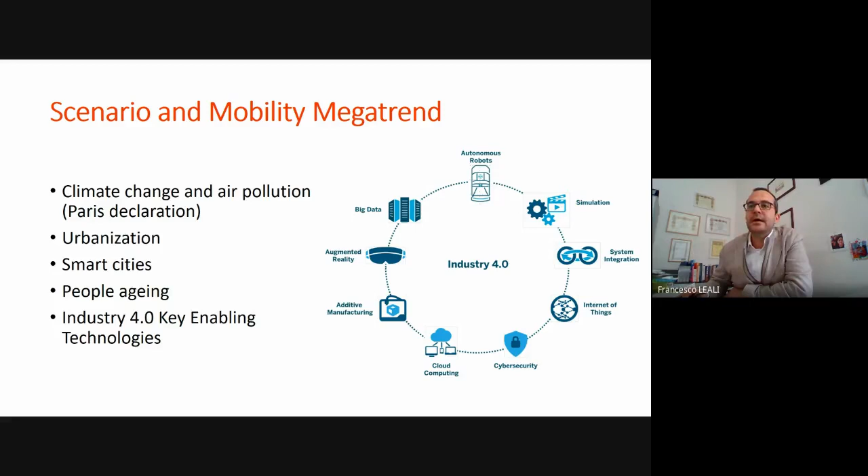If we stay on the vehicle, on the production and design of high-performance vehicles in particular, but let me say all kinds of vehicles that we are used to know and discuss every day, we have to consider some trends from a technological point of view.

Vehicles are more and more IoT devices, always connected, and are full of devices for driver assistance in order to help and to increase the safety on board.

But we have to develop and study also new solutions for powertrains in order to reduce emissions, in order to reduce consumption, in order to increase performance with respect to the environment.

And we have to exploit new technologies such as machine learning, artificial intelligence, that can help drivers move better along the roads and increase the performance of the vehicles themselves.

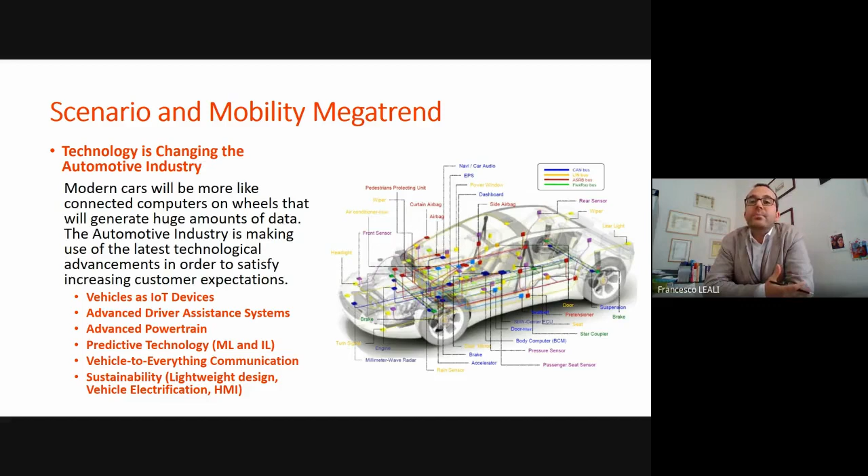Lightweight design, vehicle electrification, human-machine interface are other important keywords that you have to consider in our programs, in our educational programs in particular.

That's why we need to prepare a sort of super students, people able to know many topics: mechanics, but also electronics, automation control, IT, people able to discuss within multidisciplinary teams about economics, medicine, law, science, and to integrate using a vision based on the system of the vehicle to find solutions to problems that we don't know today. So it's very difficult to understand how the next future student, the next future professional in automotive will look.

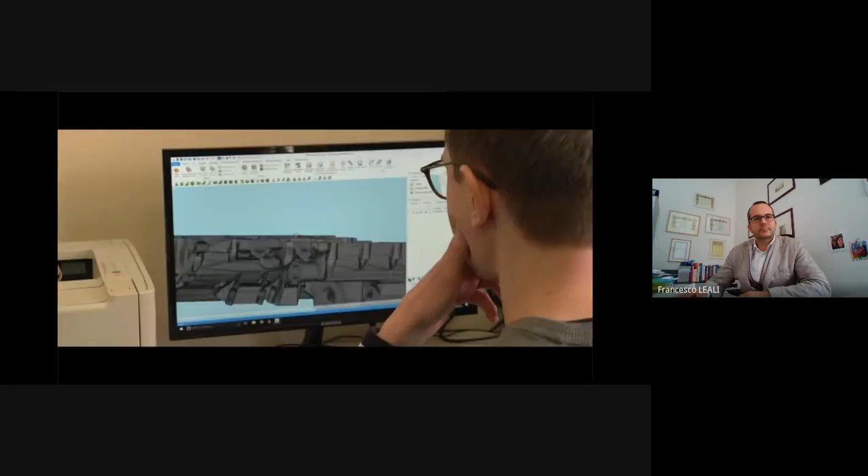All of them under 3 master's degrees with an innovative learning by doing approach. The most famous automotive companies in the world put their know-how and the most innovative technologies at the service of students, to train the engineers of tomorrow directly through their professionals. With MUNER, the most talented students will shift from designing to testing within the most renowned manufacturers, with the skills of those already pursuing the future and bringing it forward.

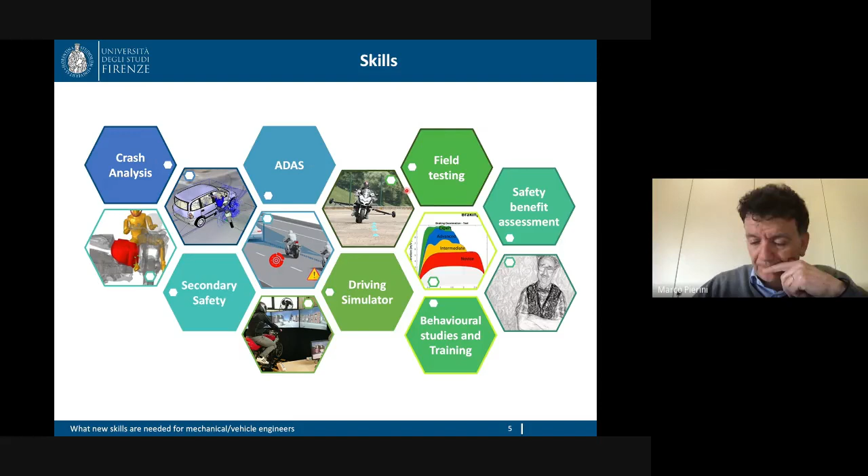Let's start from the beginning, just an example. If you would like to use your knowledge to solve these problems, you must start from the analysis of the real crash. You have a crash between a motorcycle and a car, and you need to understand the causation, why these crashes occur. In order to do that, you start collecting information, you investigate the vehicle, and then eventually you can reconstruct the accident.

What type of knowledge do you need? You need good knowledge in mathematics and physics, but also specific knowledge in structural engineering, which allows you to understand at what speed the motorcycle impacted the car in order to produce this type of damage.

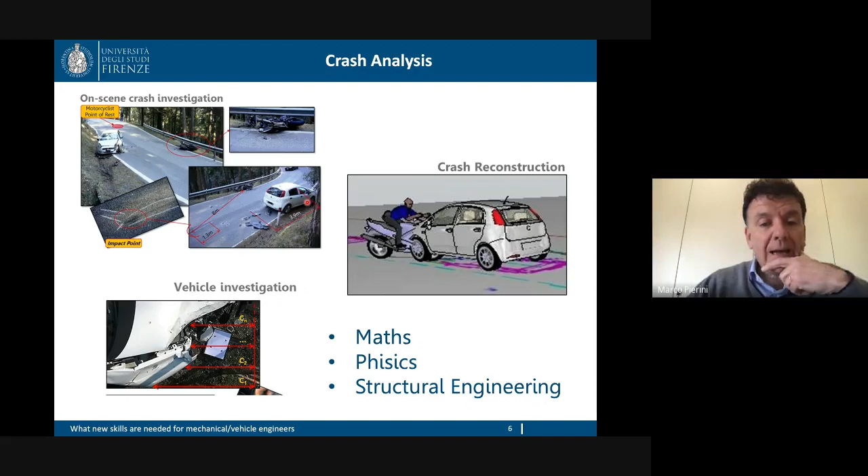Once you have understood the causation, you may desire to reduce the injuries of this type of crash. For instance, you can desire to develop a new type of helmet which protects the most delicate part of the human body, which is the head.

In order to protect the head, you need also to understand how the injury occurs on a brain. So you need to have information and knowledge on the biomechanics of the injury mechanism.

In order to develop the helmet, you need to acquire knowledge in computer simulation, because nowadays when you design a new device, you are always using simulation. But you also need to test the material, because inside the helmet you would like to include a soft material, for instance a foam, which is supposed to reduce the injuries in case of an impact.

Once you have developed your helmet and you have your first prototypes, you may desire to test them using a drop tower, a machine that lets the helmet hit an object and measure the acceleration that you have in a fake head.

So what type of skills do you need? You need information or skills in materials and material testing. You need, of course, knowledge in machine elements if you would like to design this new machine. And as I said, knowledge of biomechanics and computer simulation are also compulsory.

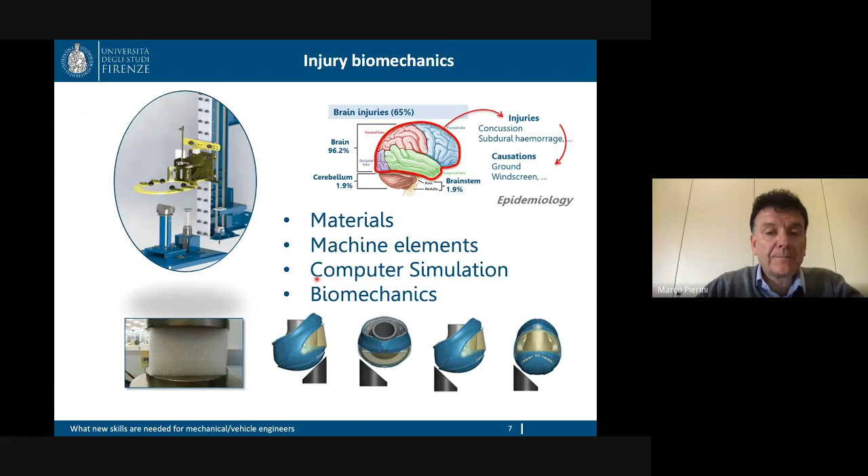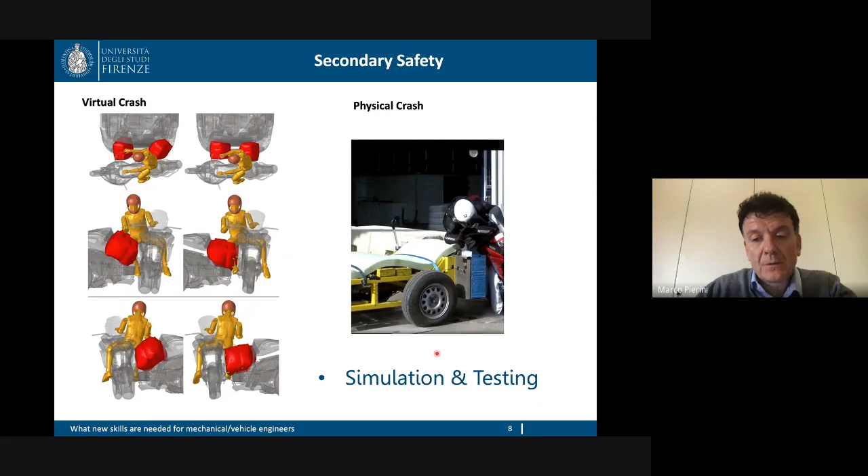But then you may desire to develop other types of protections. For instance, you would like to protect the leg of the rider by means of lateral airbags. Once you have simulated the system and decided the size and how to inflate your airbag, you need also to test experimentally the system. So you do not only need to have simulation skills, but testing skills are also very, very important.

Then let's move to the current and future of vehicles, which is the so-called ADAS, which stands for Advanced Driver Assistance Systems - systems which provide further information to the rider and let the vehicle interact with others. These systems are mainly based on sensors like radar, LiDAR, and cameras, which allow your vehicle to detect the vehicles in front of you, a car, a truck, and so on.

When you have detected them, you need to develop the algorithm to let the vehicle know that the vehicle in front of you is braking, for instance, and communicate this to the rider, and eventually, if necessary, also brake the vehicle on its own without the intervention of the rider.

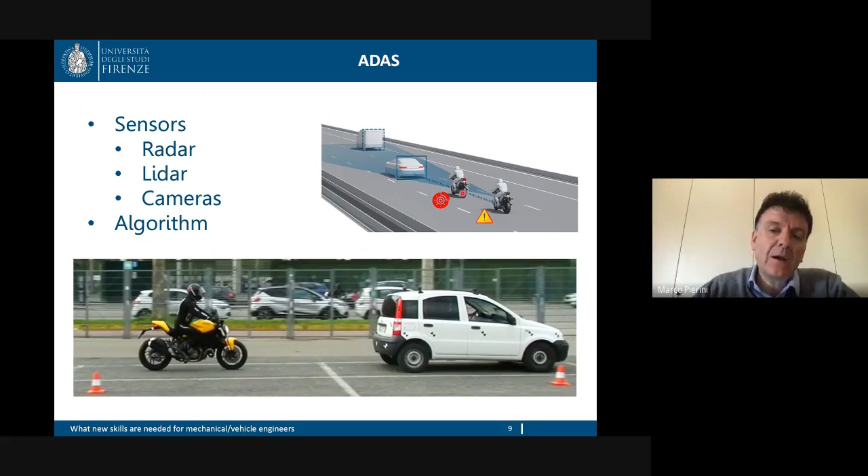Once you have developed this system, you may need to test it. Where do you test it? You may need to test it on a road open to traffic, but usually before that you need to test on a track. In order to perform the test, you need to install a lot of sensors on the rider and on the vehicle: accelerometers, gyroscope, GPS, pressure sensors, and so on.

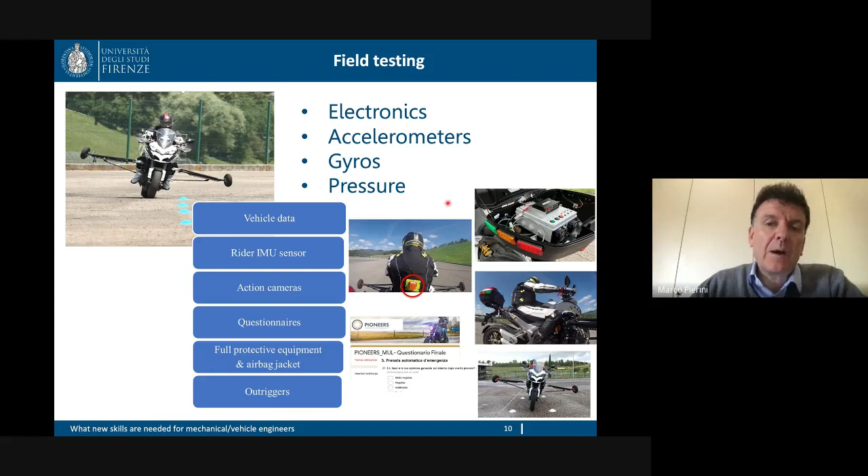You also need to have at least basic knowledge of electronics, because these sensors provide information, signals that must be acquired by acquisition systems. So you must be able to have a system which acquires this information for you and manages it.

Suppose you would like to perform a test with different types of motorcycles and different types of users in order to understand performance, for instance, in an emergency braking maneuver. To do so, you need to understand human behavior. So even if you are an engineer, you need to have at least a basic knowledge of the cognitive functionality of the brain and the behavior of the user.

This allows you to understand the difference between a beginner or novice rider and an advanced or expert rider. Or you may perform what we call naturalistic studies, which consist of installing a lot of sensors in a large number of vehicles, 100, 1,000 vehicles, and providing them to normal users for normal life, going to school, university, work. This allows you to collect a big amount of data, what we call big data.

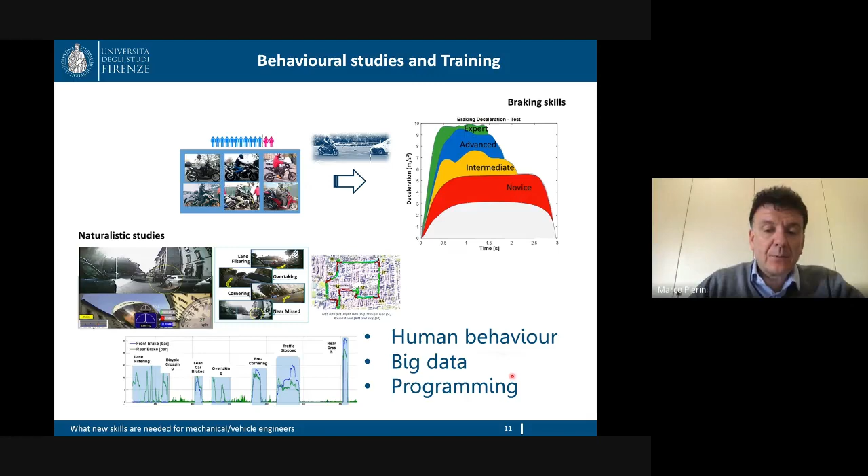But once you have all this data, you cannot analyze it manually. You need to develop your own proprietary programs to automatically detect the different behaviors, for instance when someone is braking, or overtaking, or cornering. So programming skills are very important together with human behavior skills.

Last, the future of vehicle development is also very much based on simulators. You have truck simulators, car simulators, and also motorcycle simulators. This technology is using more and more techniques like machine learning and artificial intelligence in order to interact with and adapt to the user. So knowledge of this technology, typical of the sector of informatics, is very important also for a mechanical engineer nowadays.

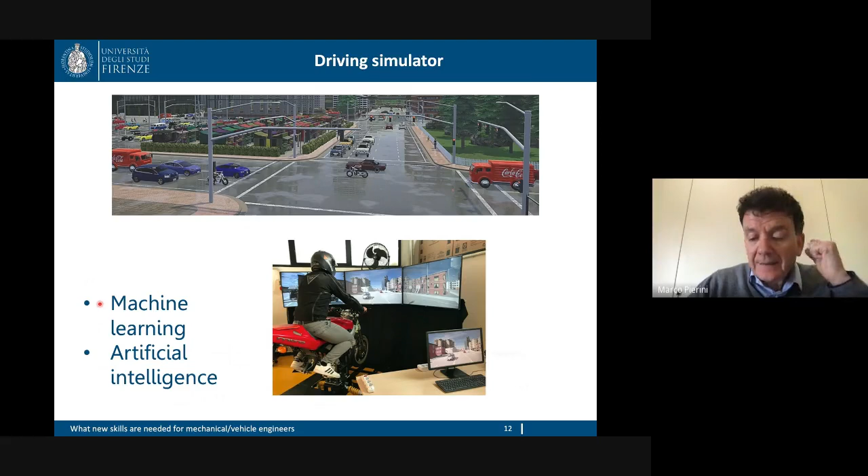Okay, that's it, I tried to stay within the 10 minutes. I hope I gave you a little understanding of what skills you need for the future development of vehicles. I will be available for questions, if any, at the end of the webinar. Thank you for your attention.

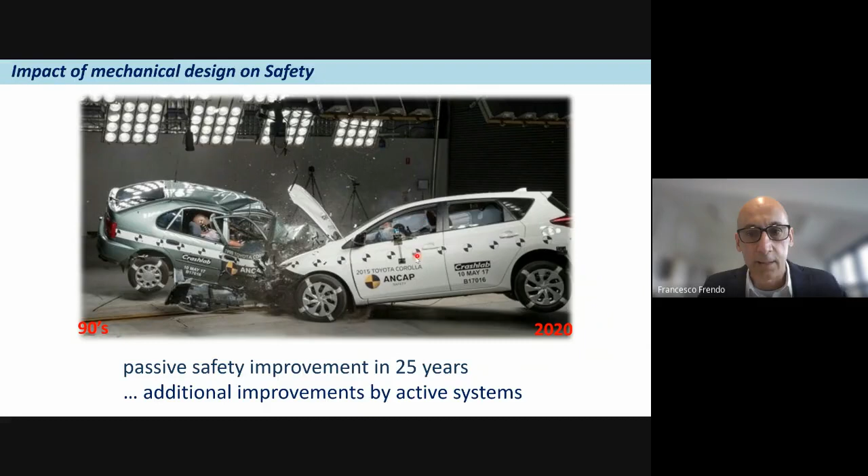You can see the results of a crash test of the same kind of car in the 90s and of a today's car. We can appreciate the integrity of the cell where the driver is inside. But maybe the greatest actual transformation in the automotive field is represented by the introduction of electric vehicles.

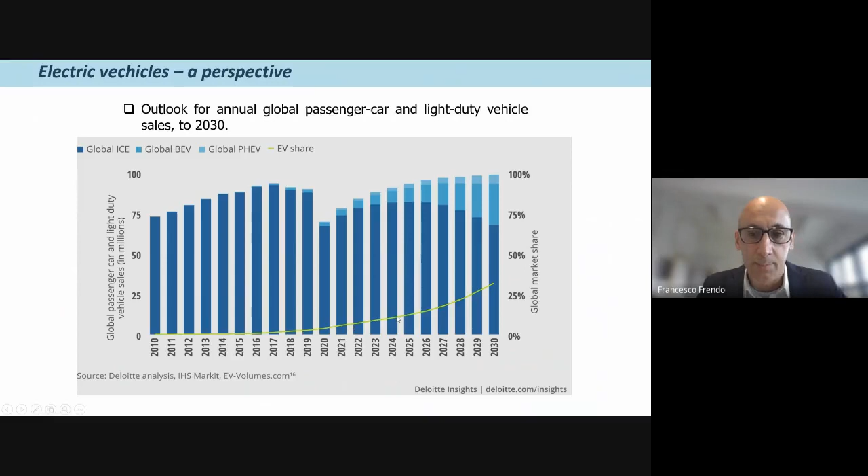Okay, but we are engineers, so we have to be curious and do some technical evaluations. So I try to do an exercise: what are the reasons of fuel consumption and the reasons of emissions?

We have three sources of power consumption, represented by rolling resistance, road grade, and aerodynamic resistance. This is the sum of three contributions, and this is why we need about 4 to 5 liters of gasoline per 100 kilometers for passenger cars.

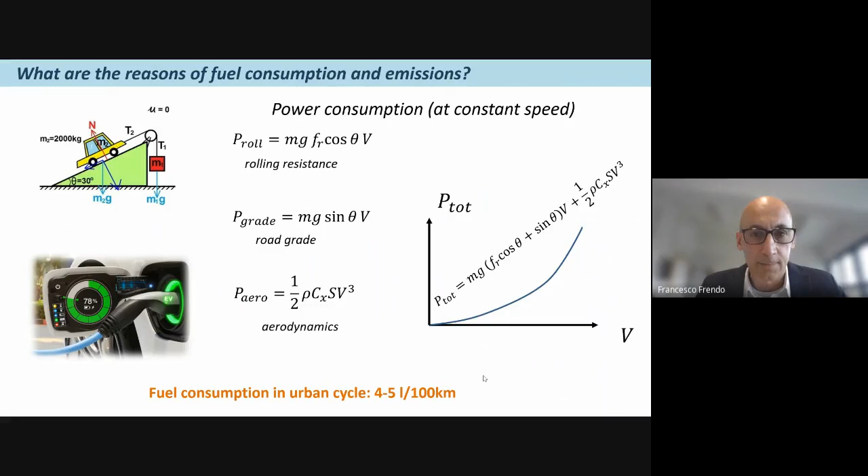There is another kind of power consumption due to vehicle acceleration. If we change the kinetic energy of the vehicle, we need power. For a typical car of about 1,200 kilograms going from standstill to 50 kilometers per hour in 5 seconds, we can evaluate the required average power for each of the previous contributions.

For the grade, I consider a road grade of about 5%. We can see that we have about 30 kilowatts needed for acceleration, and less power for the other sources. If we relate this to 5 seconds of vehicle movement, we achieve the energy.

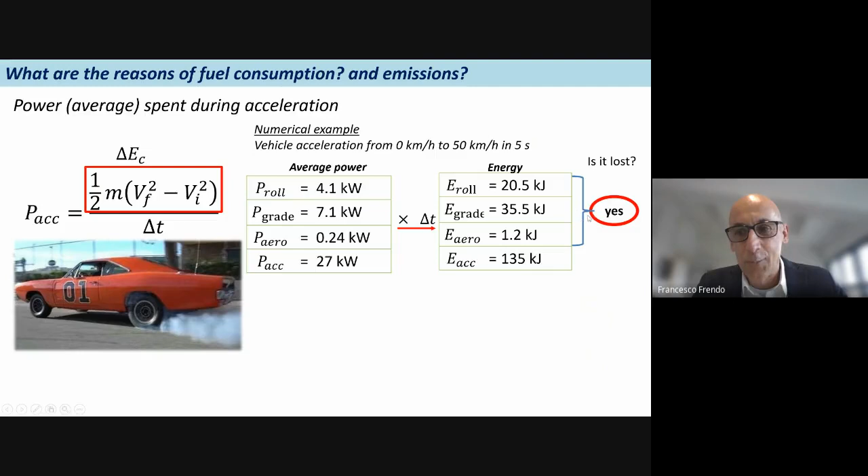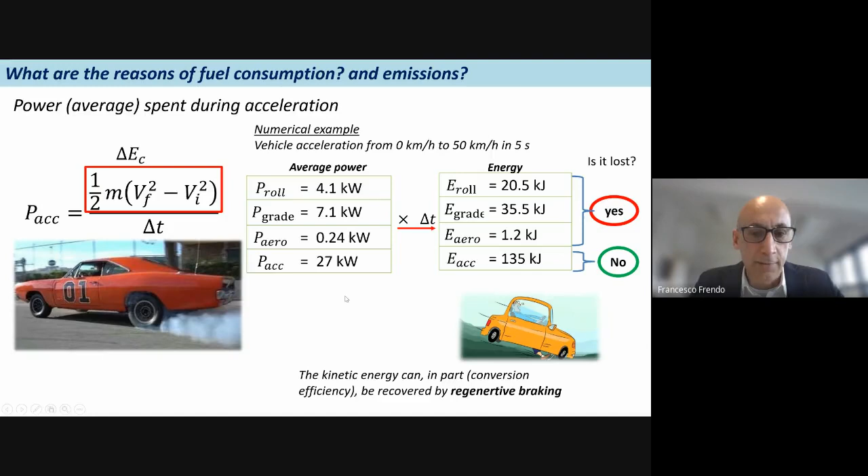Are these energies lost? Yes, the first three contributions are lost - I mean rolling resistance, road grade, and aerodynamics. Actually, road grade maybe not, because we can recover some potential energy, but for sure the acceleration is converted into kinetic energy and can be recovered by regenerative braking. So this is an important contribution that engineers have the opportunity to recover.

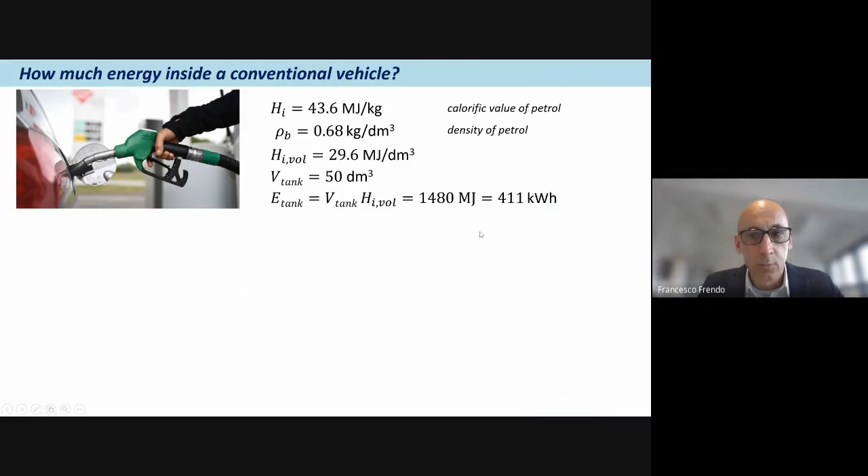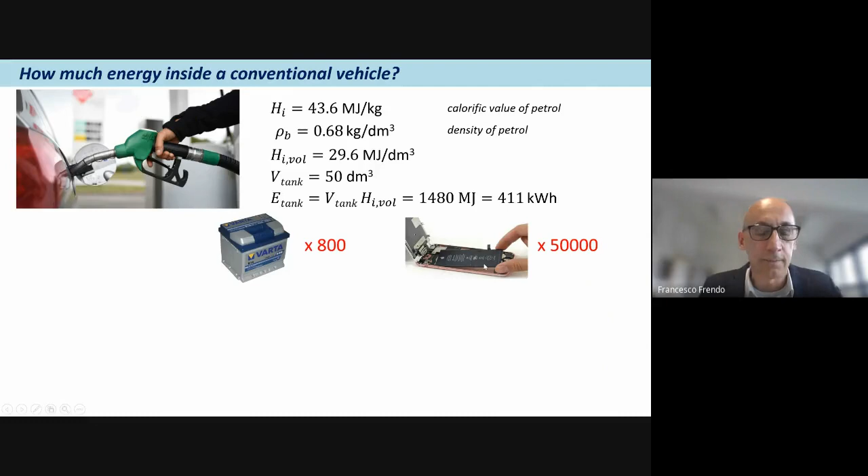Another point is how much energy is inside a conventional vehicle. If we consider the calorific value of petrol, its density, and the volume of a usual tank, we get that inside a common vehicle we have about 400 kilowatt-hours of energy, which is the content of about 800 conventional car batteries or 50,000 conventional batteries which are inside our phones.

This is intentionally critical. If we consider fictitious power - I mean if I consider the time I need to put this energy into the car - so we have 400 kilowatt-hours in 60 seconds, I will get a huge amount of power, about 25 megawatts, which means 8,000 times the installed power in our civil houses, and about 1% of an electric power plant.

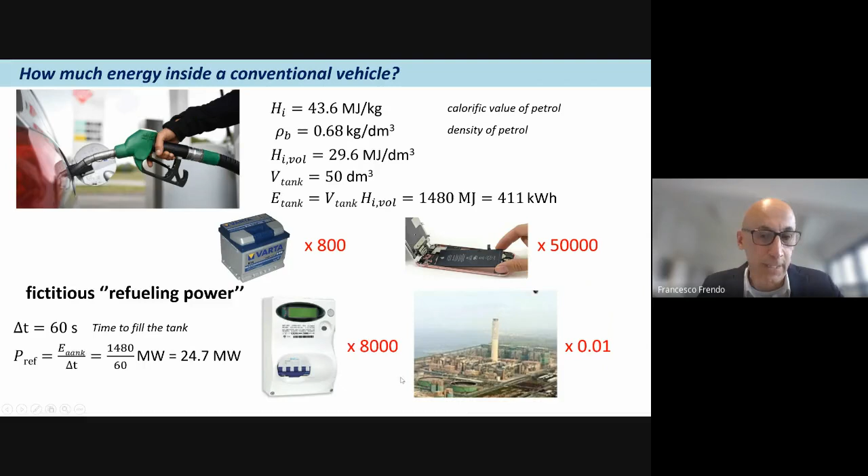What about electric vehicles today? We have to recharge the vehicle by this kind of recharging station, which in Italy has at least about 40 kilowatts of power. This means it's about 1/500th of the previous fictitious power that I considered.

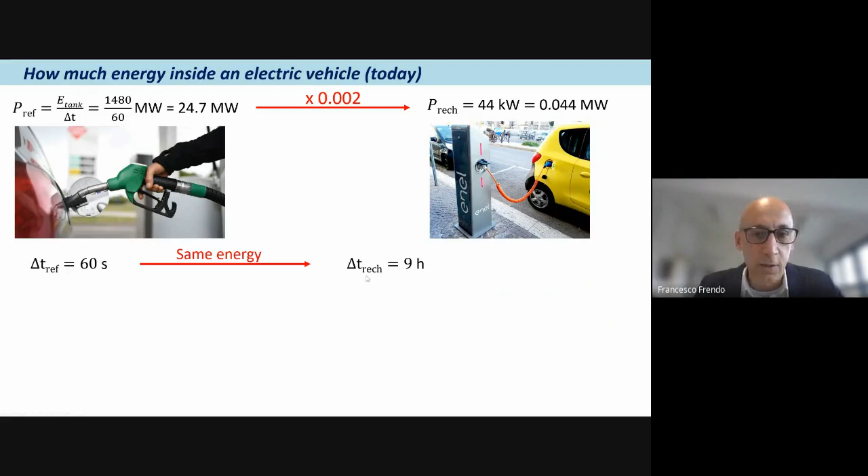So if I want to put the same energy into the car, this means I need about 9 hours. Yes, but this is not true, because I have to consider that electric powertrains have better efficiency with respect to internal combustion engine cars. Overall, I estimated the efficiency is about twice, considering the electric motor and the transmission.

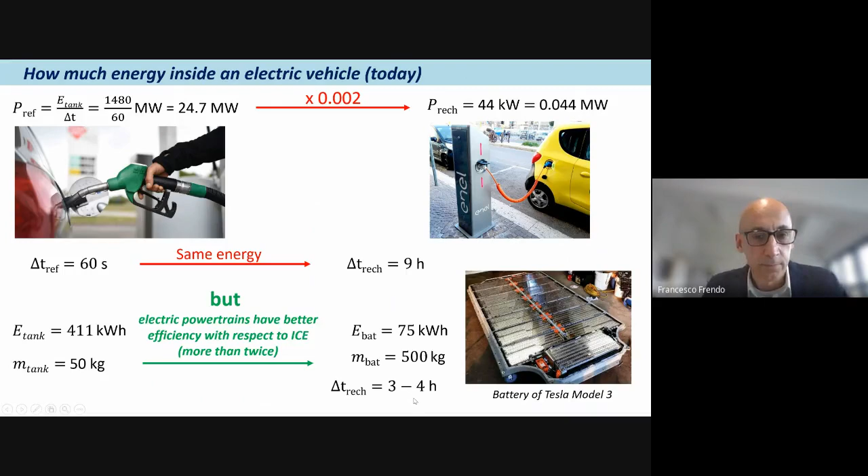So instead of needing 400 kilowatt-hours, we need about 1/4 or 1/5. This is referred to, for example, a well-known electric car. So with this energy and with this recharging power, we need few hours for recharging the battery.

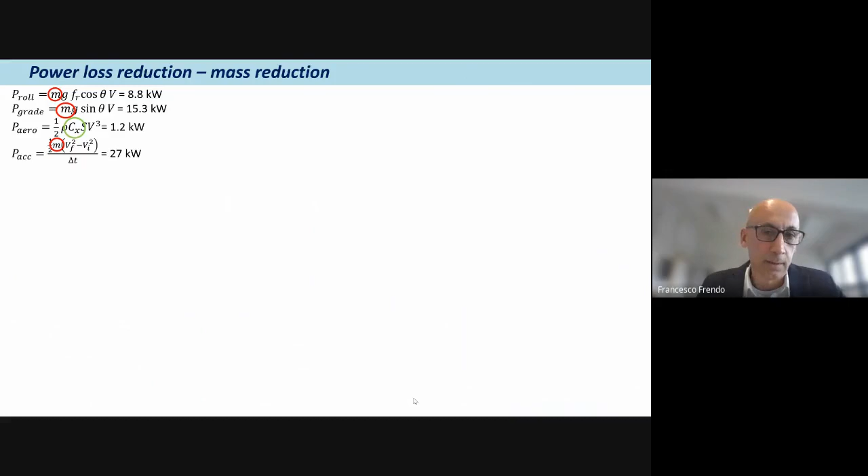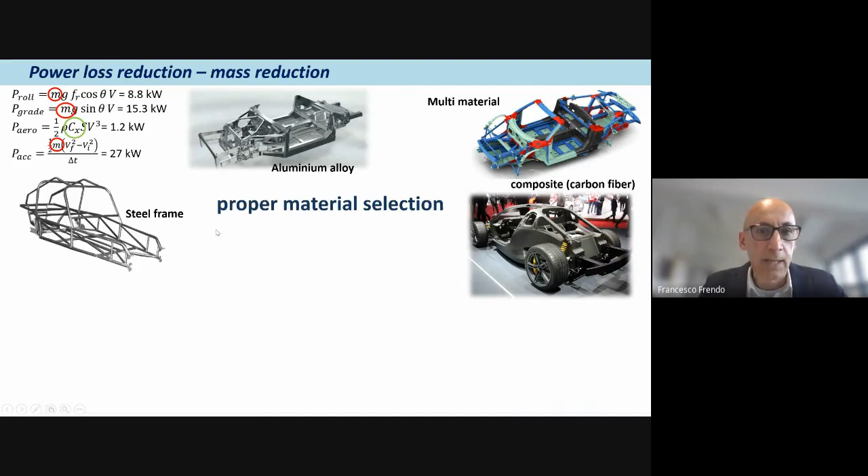We can reduce fuel consumption and emissions also by reducing the vehicle mass, since the mass appears in every contribution, with the exception of aerodynamic losses. And we can reduce the mass by proper material selection or by geometry optimization, by making a proper design of components.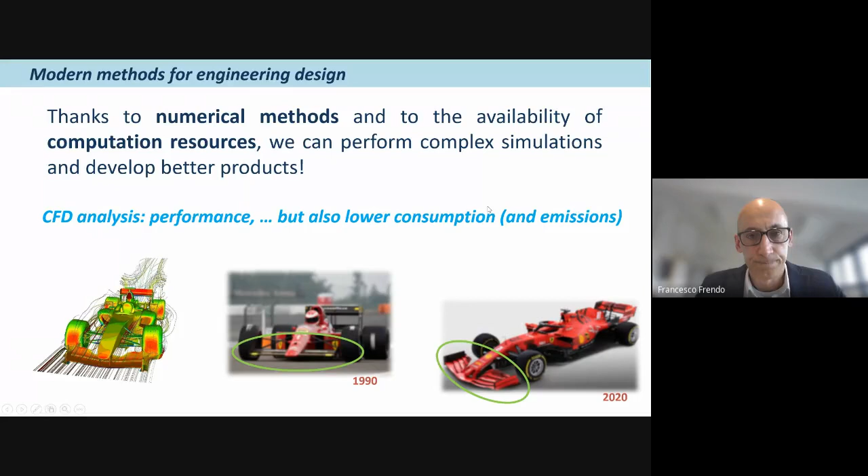We also have to consider that there are modern production technologies, I mean additive manufacturing, and the future engineer will have to choose among different production methodologies, considering the complexity and quantities of components to be manufactured.

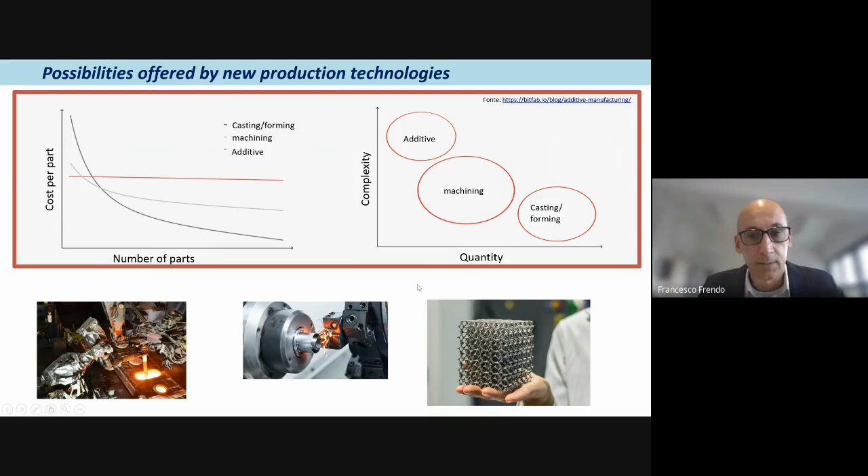In this last picture, I show some examples of complex simulation which were developed under student theses at our university in cooperation with, in this case, Piaggio, which is nearby Pisa. The simulations are related to handling, comfort, structural integrity and durability.

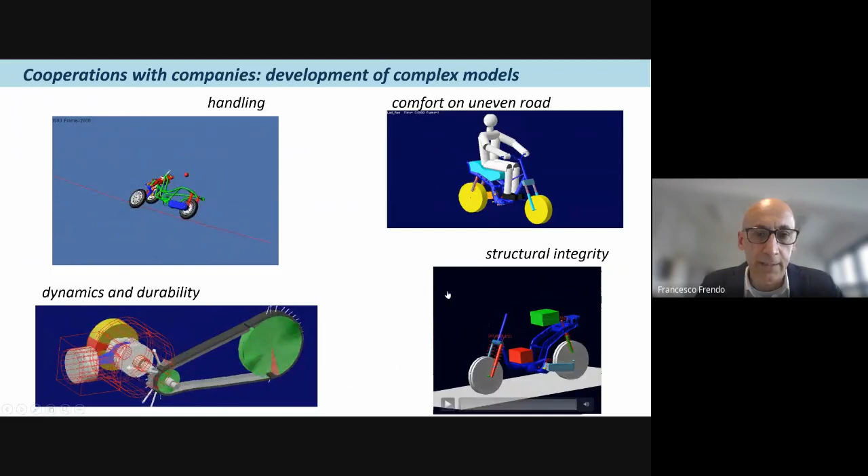So what expertise should future automotive engineers have? The answer is simple, but we have to reflect on this. The future engineer will have to deal with mechanics, aerodynamics, testing, electronics, information technology, and so on. So what we try to do at our university is to give strong basics in engineering.

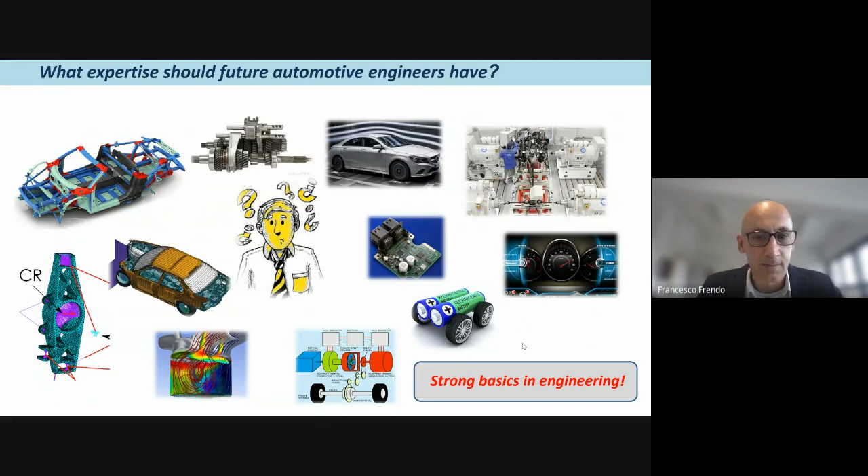And these are my concluding remarks: pure electric vehicles will increase their penetration onto the market, and conventional vehicles are currently being replaced by hybrid vehicles.

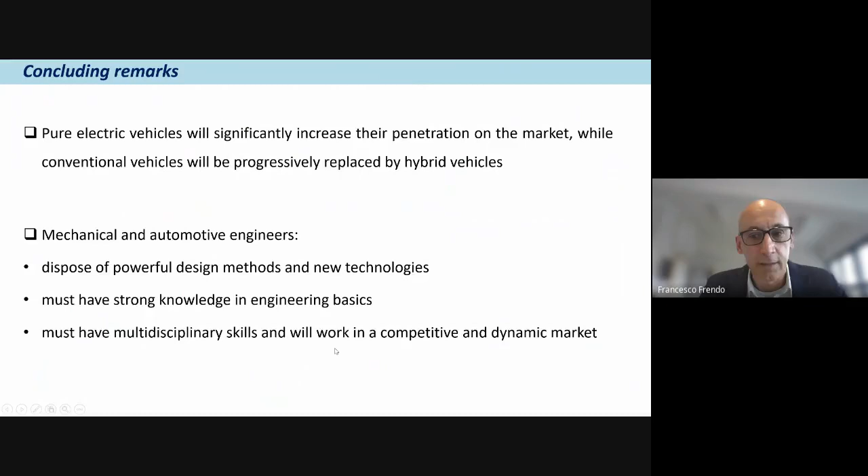Mechanical and automotive engineers will dispose of powerful design methods and new technologies, but they have to possess strong knowledge in engineering basics and have multidisciplinary skills, and they will work in a competitive and dynamic market. So I thank you for your attention.

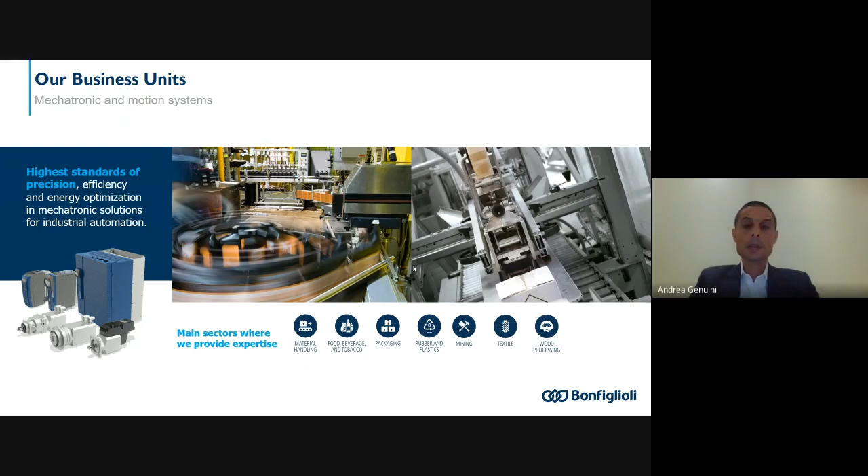The second business unit is mechatronic and motion system. Here we produce inverters, servo motors, and precision gearboxes, low backlash gearboxes for industries where repetitivity and productivity are very important. For example, packaging industry, textile industry, wood processing industry. The third one, the most traditional one, is the industrial business unit.

Here we cover all the other industries that you can have in mind, like food and beverage and tobacco, rubber, plastic, steel, material handling, wastewater treatment, and so on.

In Vietnam, we have a large factory, a 22,000 square meter plant on a plot of almost 94,000 square meters, so we have plenty of space for future expansion.

We have an installed capacity of more than 450,000 electric motors per year in one shift, and approximately 39,000 gearboxes per year. We employ more or less 200 people in Vietnam.

These are some pictures of our factory in Vietnam, and you can see that the standard of the factory is absolutely equal to the factories that we have in Europe. So we don't compromise on quality.

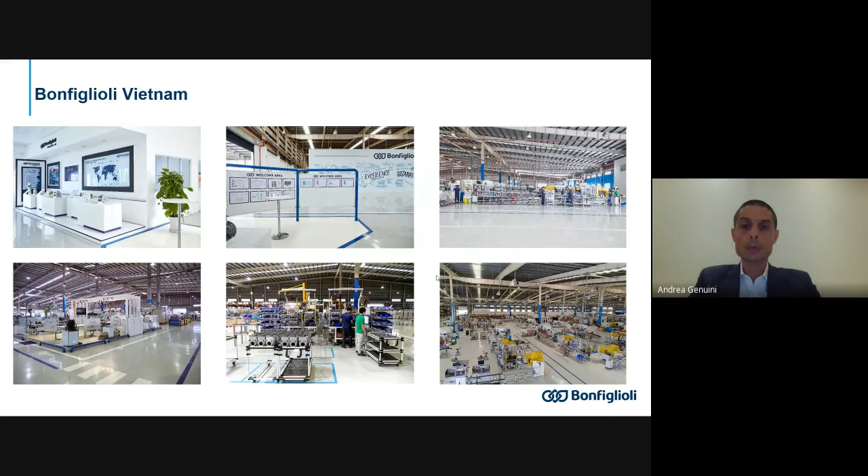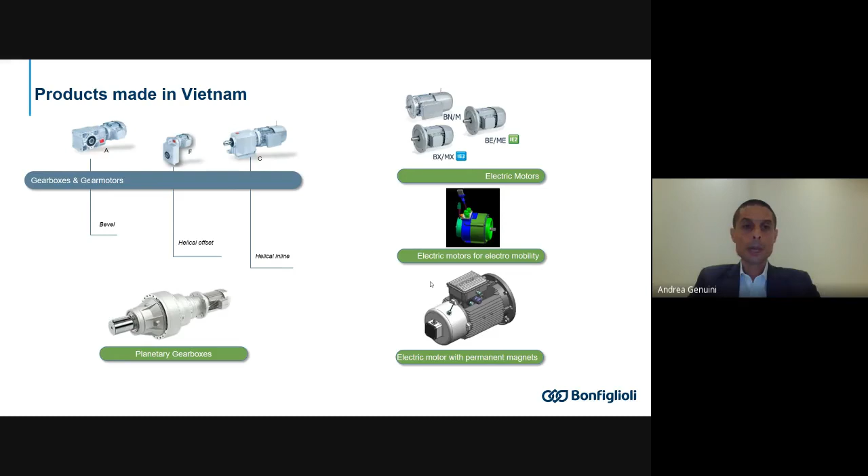The product that we make in Vietnam is mainly electric motors, because Bonfiglioli Vietnam is the manufacturing hub for the group for electric motors. So IE1, IE2, IE3 motors - different efficiency classes - motors for electromobility, and motors for wind, also with permanent magnets. And also gearboxes, helical gearboxes, but also planetary gearboxes.

Mainly in Vietnam, we produce for export. So we export our goods mainly to Europe - almost 55 to 60% of our goods go to Europe, 20% go to India, and 10% goes to China. The rest is spread across America, Southeast Asia, and South Africa.

Our collaboration with university started in 2016 with a collaborative agreement for consultancy between the University of Modena and Reggio Emilia and Bonfiglioli Vietnam. Based on this agreement, the university gave classes to our people in Vietnam on two topics: electric and electronic measurement, and electric circuits. The university provided 364 hours of training to 7 people on these two topics.

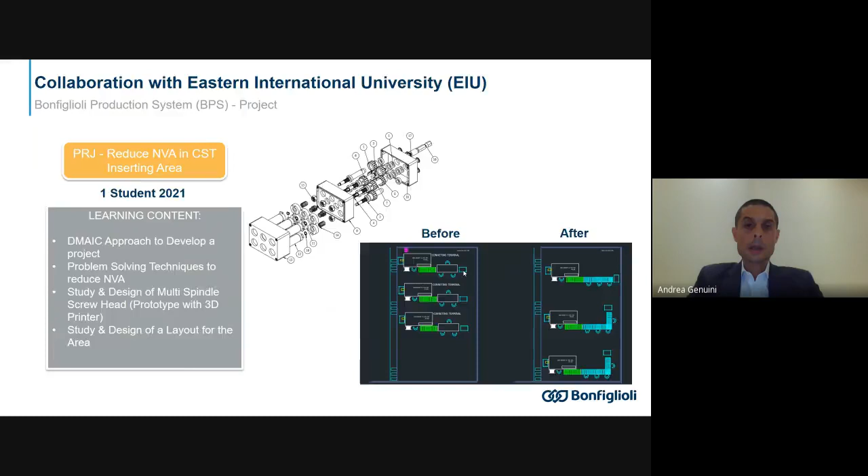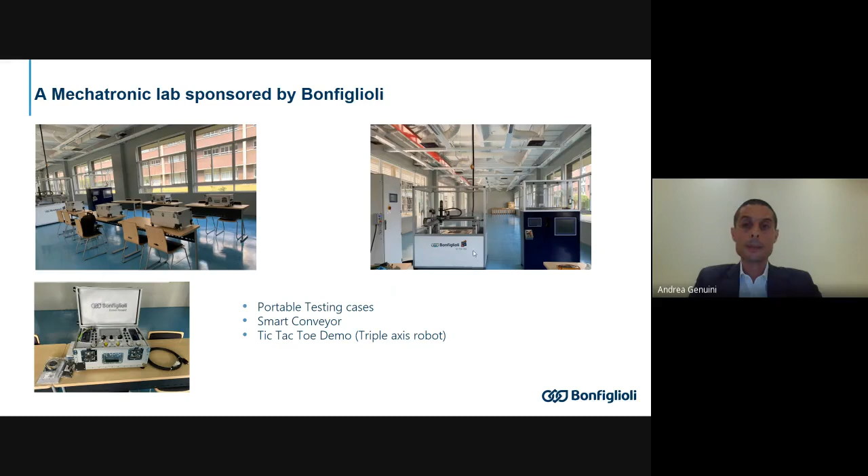That's all from my side. I hope this was a little interesting for you, and that you can understand better who we are now.